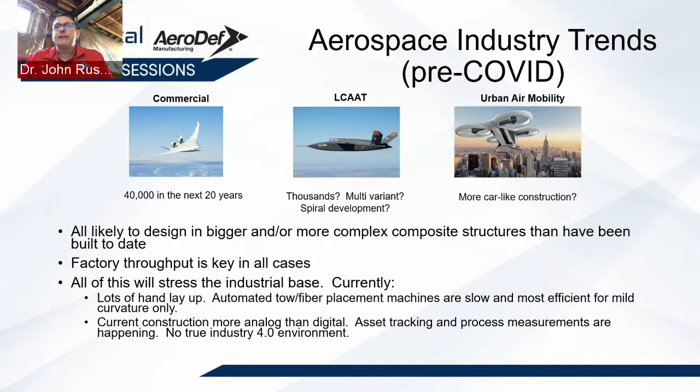So back in the fall of 2018, AFRL sponsored a workshop to try to get a handle on where we needed to make future investments to address some of these issues. Two of the key areas I'm going to address: first of all is low-cost, agile manufacturing, where in the future state, we look to have a full understanding of our process capabilities, and we have a goal of a 50% reduction in the design and manufacturing cycle time so we can meet those rapid spiral development rates.

We also want to be able to rapidly reconfigure manufacturing lines to meet various product mixes and perhaps surge demand, if maybe we need to break in and take over somebody else's production line so we can surge when we need to build a lot more of these things.

So solutions to that: one area is to look at the cure cycle. If you look at traditional aerospace epoxies, it takes forever and a day to make a part in an industrial size autoclave. How can we be aggressive about the cure cycles to really cut those autoclave times down, maybe even in half? But also we want to look hard at automation.

There's a lot going on in automation for automation's sake that the Air Force Research Laboratory is either sponsoring or leveraging from other research efforts, like collaborative robots, robots that interact with humans, flexible robotic systems that can be reprogrammed much easier than today. So really reprogramming on the fly as needed.

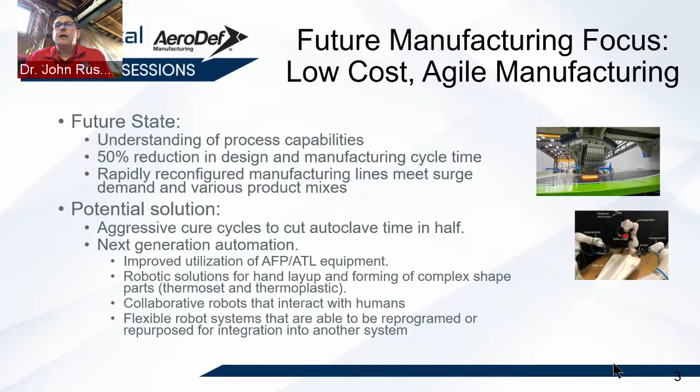Then the other big area to share with you is quality assurance. So, in the future, we would love to have quality assurance in line with the process and as an alternative to post-process inspection. Post-process inspection is a cost, and it's a rate-limiting step for suppliers to get parts out the door and to get paid for them. And really, these in-process sensors apply both to as-manufactured as well as in-service conditions. Could we use sensors in service as well to address the state of the airplane?

So some potential solutions. I mentioned we're not really employing Industry 4.0. How can we use those kinds of tools to provide an understanding of the state of the part? What can we do with artificial intelligence and machine learning to improve throughput? There was work as neural nets were in their infant stages back in the late 80s and 90s that really has stood still since then. How can we use that to improve the way we build today?

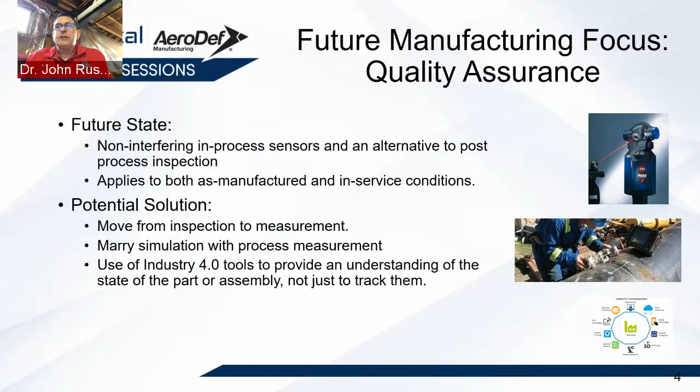But also a couple things I stole from Anoush, who'll be talking later. How can we move from inspecting parts to actually measuring parts? And how do we marry the simulation environment with that process measurement so we can have a continual feedback loop? So with that, that's just a few things I wanted to tease up with everybody today. So we're going to move on then.

Next up is going to be Dr. Anoush Poursartip. So Anoush is a busy guy. You can see he has 3 jobs here. He's a professor in the Department of Materials Engineering at the University of British Columbia in Vancouver.

He's also director of the Composites Research Network and also director of research with Convergent Manufacturing Technologies. So Anoush has worked in digital manufacturing for over 30 years. He's focused on the manufacturing of advanced composite structures, primarily for aerospace. Anoush is a recipient of the Medal of Excellence in Composites from the University of Delaware and an ASTM Wayne Stinchcomb Award, and he's a fellow of the Canadian Academy of Engineering, ICCM, and SAMPE.

So Anoush, over to you. Thank you very much, John. If we could go to the next slide. John's given a great introduction.

So what I'd like to do is just sort of walk us through some thoughts on what would next generation composites automation look like. And the reality is, if you look out there, digitalization is with us. Industry 4.0 is the talk of the town. Automation is considered to be so 3.0. And yet we have to be honest and acknowledge that in composites, we're lagging even in the adoption of automation. So we have to ask ourselves, why is that? Because only then can we actually move forward.

The thing to realize is that the value of composites products is really quite high, but our volume is small. To give you an example, if we think of a twin-aisle commercial airplane being worth $100 to $200 million, that's the equivalent of 100,000, 200,000 smartphones. And so you can't just blindly apply lessons from the other sectors to us, because a couple of 100,000 smartphones, that's a lot of repetition, whereas the whole point of what we do is that we have total difference in every piece of the airplane.

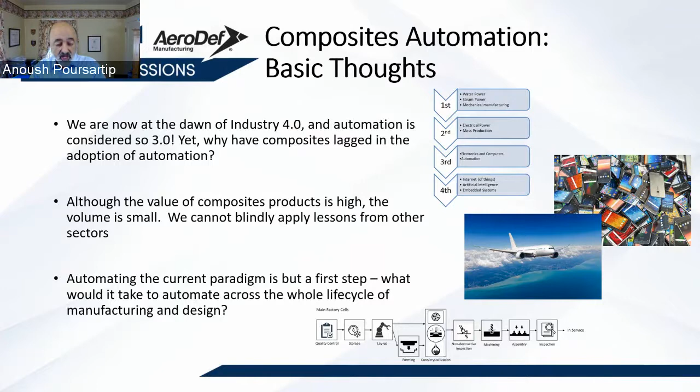So if we focus on automation per se, the classic automation paradigm is sense, think, act. And so the real fundamental questions we should ask are, what is it we should sense? How should we sense it? And then why? What are we going to do with it? If you actually look at some of the trends in composites manufacturing right now, people are actually trying to avoid measuring things. And the reason is we don't know what to do with our measurements right now. So we've got to overcome that. Then we've got to ask, do we have enough data? If we don't have enough data, how do we generate the knowledge?

The next point is, we shouldn't look at just one cell in the factory. We should look across the whole factory. There's no point optimizing something in one cell if that benefit disappears in the next cell, or vice versa, if something we do early on affects things downstream. If my out time in my AFP cell affects my cure, I need to understand that, I need to manage that. That actually then takes me to, when I do things in the factory, how can I actually have the right level of accuracy, the right level of capability?

All of this goes to realizing that what we're trying to do is trade non-recurring cost with hopefully decreased recurring cost. So it's all about a trade-off between cost, rate, quality. And within that, we have to realize that there's a perverse effect of automation, which is that you actually front-end load your risk. Once you buy that automation, you're stuck with it. So you'd better make sure that it works. John alluded to this issue of agility, of being able to be versatile. How can we make sure that when we go to automated systems, we still retain that ability that humans have to change things on the fly?

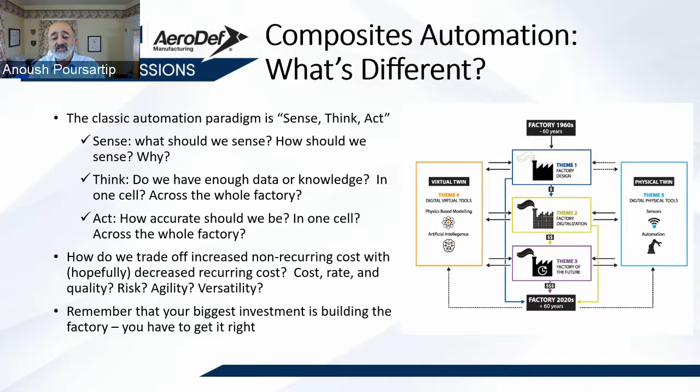And again, the thing I really want to emphasize is that the biggest investment we make, even though we tend to think about the product, is we're building a factory. And if that factory can be used not just for this product, but for other products, then of course you're amortizing that non-recurring cost effectively. To do that, you really need to think about the transition from the world of today to the world of tomorrow, all the way from existing factories, how do we automate existing factories, through to how could we go to a world of the future, that Industry 4.0, which beckons in a way that is actually tractable in all the ways that we need to do it. Next slide. Thank you.

So it is my firm belief, and I would argue this quite strongly, that the only way we're going to succeed in doing this in the composites arena is by fusing classic Industry 4.0 with a product materials-centric integrated computational materials engineering approach. In other words, your digital thread has to be science-based. It's the only way we're going to allow for all the complexities that exist in composites manufacturing.

That would allow us to link materials design to product design, to factory equipment design. It allows us to do the things that John alluded to in terms of turning inspection into a value-added activity. And it would actually allow us to then create certification and regulation in the way that works.

In terms of my own work, at UBC, we're really pushing what we have developed over a couple of decades in science-based simulation into production. And we're reimagining how research and education occurs in such a world. We're talking about how if medicine has teaching hospitals, why don't we have learning factories in engineering? And obviously there would be digital learning factories. And we're bringing a much bigger group of stakeholders to play.

And at Convergent, our focus is very much pushing simulation-based capabilities into the factory, fusing science-based simulation and data science. Because without that, we genuinely don't believe that we can really disrupt the world with automation.

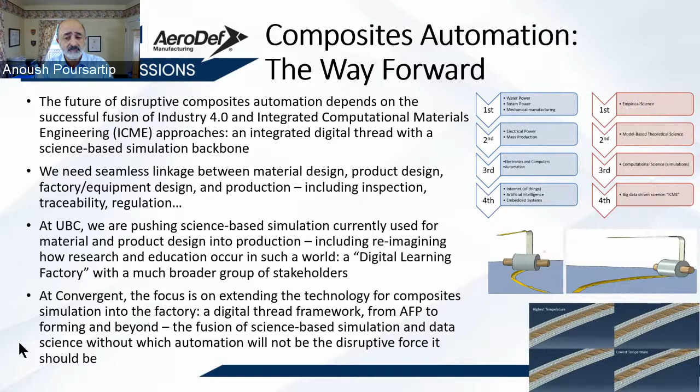So next up is Waruna Seneviratne from Wichita State. Waruna is director of the Advanced Technologies Lab for Aerospace Systems, or ATLAS, and he's senior research scientist for composites and structures at Wichita State's National Institute for Aviation Research, or NIAR. So Waruna is responsible for a research portfolio that includes projects from the FAA, DoD, Homeland Security, NASA, and aircraft industry in the areas of advanced manufacturing and inspections, durability and damage tolerance, certification, and structures. So Waruna, over to you.

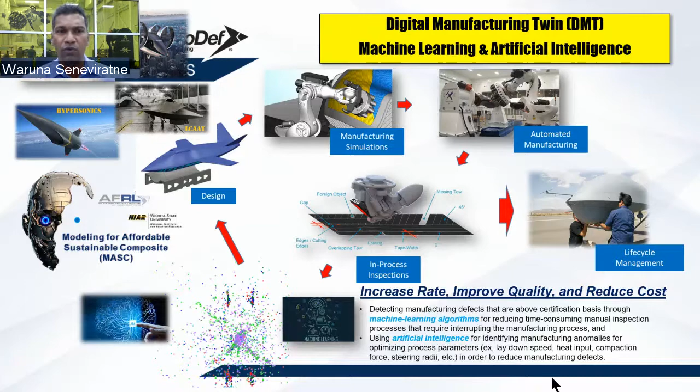So in order to tackle this, we obviously will build several partnerships, and this is one example. We're working with the future generation as well as the industry. So we start from the tabletop flat panel inspection using handheld instrumentation to make sure our algorithms have a higher probability of detection as well as low false alarm and so forth.

And then we need to integrate this into a robot, make sure it still works, and then slowly climb up in the building block to an industrial scale robotic manufacturing system that is actually manufacturing a double contour aircraft structural part. So with what I call an Atlas, or the maker space that we have built, it allows the students and the industry to take a concept at a low technology readiness level from a concept stage to a tabletop experiment all the way to the manufacturing scale. So the scalability of your research is one-to-one.

That allows the industry to come to the university, just bring their tools, just bring the exact same program that they would use on their factory floor and do the manufacturing research, make sure everything works, and take that to their industry flow and carry on to the next step. And for small to medium-sized businesses that don't have access to this type of equipment, it basically becomes a maker space. It's a level playing field where anybody can come and have access to this type of equipment.

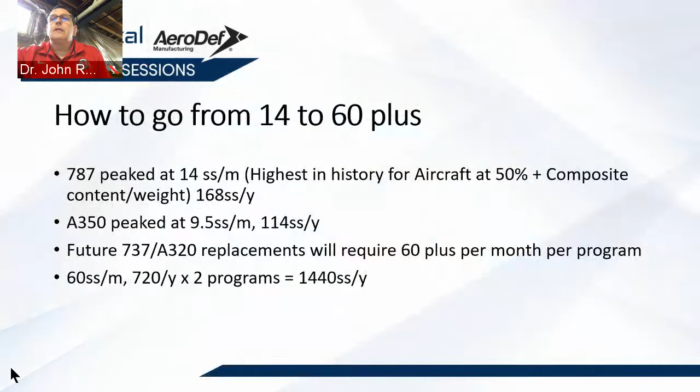Thanks, John. So this is from a machine tool manufacturer's perspective. So my headline here is how do we go from 14 to 60? If you look at today, the first two programs with heavy composite content and heavy automation were both the 787 and the A350. The 787 peaked at 14 ship sets a month, 168 a year, and then the A350 peaked at 9.5.

In the future, to address John's initial statement of going from 20,000 to 40,000 aircraft, a future single aisle for either Airbus or Boeing is going to need 60 plus per program per month, which is significantly higher than what we've seen in the 787 and the A350.

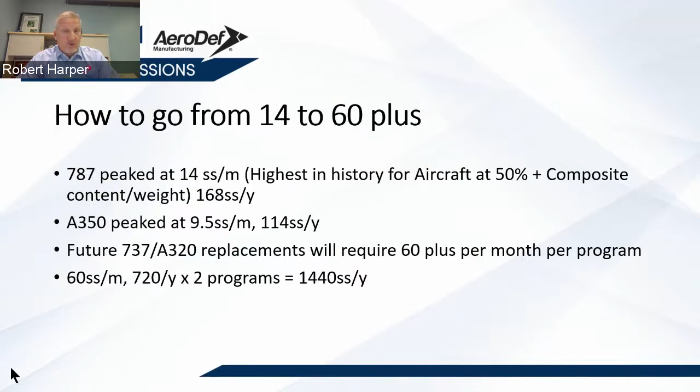So if you just use the 787 today just for the fuselage, not including any stringers, just the skins of the fuselage, I believe there's 19 fiber placement machines that are used to produce those parts. There are 19 pieces of equipment around the world to produce 14 ship sets a month. Now, for a future aircraft of 60 per month, you would be upwards of 50 machines for just one program at the same rates that we lay up today. If you multiply that by 2 programs, you're at 100 machines worldwide if we stay at the same overall laydown rates that we have today. Change slides.

So what do we need to do? In order to be able to produce equipment for these future aircraft programs, and again, I'm just talking about one program. There's multiple programs, military programs, space programs, there's going to be UAV programs, but just focusing on the single aisle, which will be the highest production, there's several things that need to happen.

First is we have to lay down material fast, but that's only a piece of it. Higher reliability, which is probably the largest piece, is really to keep the piece of equipment running. And when I say higher reliability, that means not only the reliability of feeding material, but feeding material, putting it on the tool in the right spot so it doesn't need rework. That's reliability to me. So we need to have a lights out mentality of building equipment that runs reliably with very little intervention. Next is we need to automate the secondary processes, and this is probably one of the biggest things.

Most customers today, everyone worries about pounds per hour and making the machine lay faster. The machine is a small piece. Waruna just mentioned it in his intro: inspection and other things make up the majority of the time. The cycle time is in a lot of cases a small percentage of the overall floor to floor.

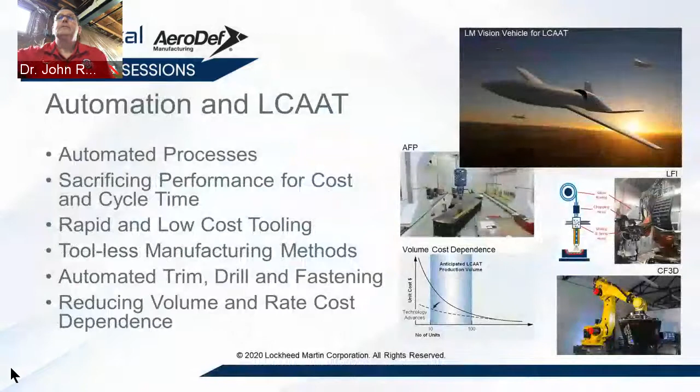Thanks, John. So this session's topic is real near to my heart, since, as John mentioned, my fellow appointment is associated with automated processes. My intro comments are going to touch quickly on a couple automation-related topics that myself and my Skunk Works colleagues are working on.

For this first topic, we'll start with automation and the Air Force efforts directed at the low-cost attritable aircraft that John summarized in his intro comments. Lockheed Martin's approach to cost and cycle time improvements on the low-cost attritables is heavily tied to automated processes, examples of which have been applied on our ongoing Wisdom program with John's group, in which we're using fiber placement, long fiber injection, and continuous fiber 3D processes to build each of the wing box components.

We're looking to leverage lower cost and more rapid cycle time methods from other industries, in particular the automotive industry. By doing so, we're sacrificing some of the performance when we gain the cost and cycle time improvements. But we really don't need the 5-minute cycle times that are common in the automotive industry. So we can substitute higher performance materials, specifically the resins, to find a compromise between performance and those cycle time improvements.

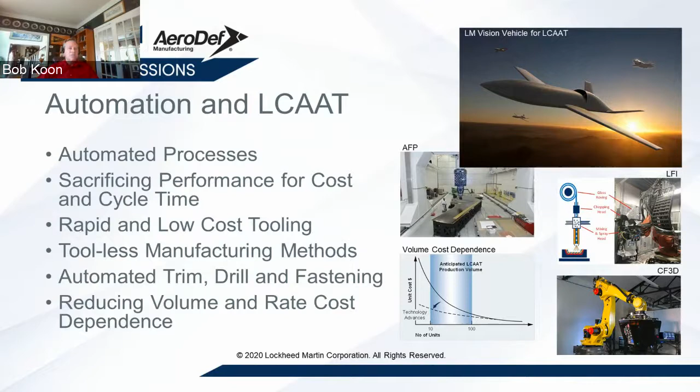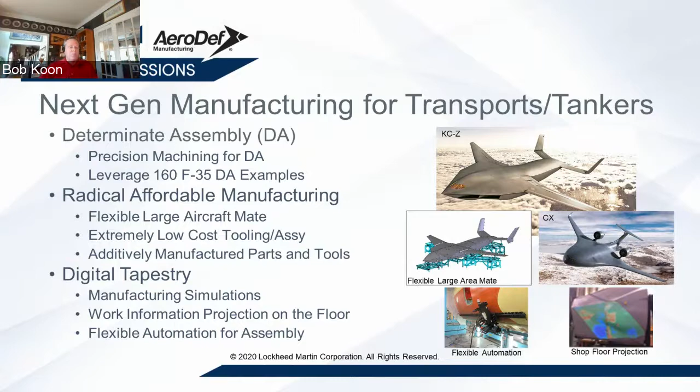There's an interesting challenge that's posed with this facility to our facilities and our management teams regarding how do we provide a highly automated environment that's also a classified environment. And while I can't touch on much about how we're tackling this issue, suffice it to say that all that interconnectivity is going to largely be restricted to the building itself. So it's going to be one giant Faraday cage, and all that automation stays within the building itself.

As you might expect, facilities design is tailored to a flexible factory floor, where the in-ground connectivity to the robots is in combination with a high reliance on flexible robotic systems, some of which was talked about a little bit earlier, allowing for a rapid reconfiguration of the manufacturing layout as designs and the vehicle variants change. John, that's it for the slides.

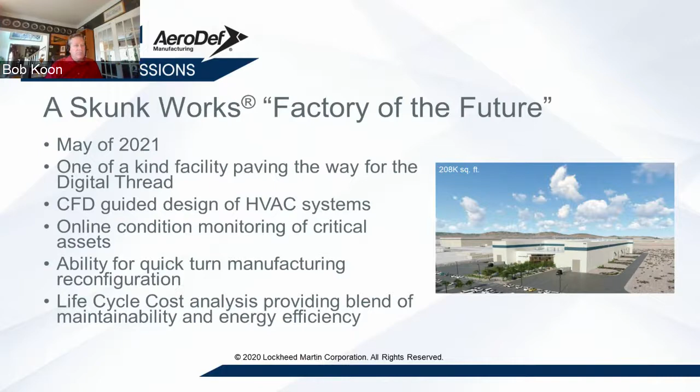So first of all, I want to ask: what are some technologies in other industries that we in aerospace need to pull in to look at to improve automation and to improve throughput in general? So let me start with Anush first, because I know you've been thinking about this space.

Oh, you're muted, Anush. Sorry about that.

So what I would quickly say is that if we look at all our other sectors, they're much more digital than we are. If you look at automotive, they do all their design digitally. Everything is transmitted into the factories digitally. They measure a lot more than we do. And so I think the biggest lessons we can learn from other sectors is how they have created value from those digital technologies in the whole life cycle. I think we're at the moment taking very small incremental steps. There's good reasons why we're doing that. But I would argue it's about a holistic approach to going digital.

Okay. Bob, let me ask you the same question. I know you're involved with Acme, and they are looking at more automotive. What can we gain from industries like automotive and marine?